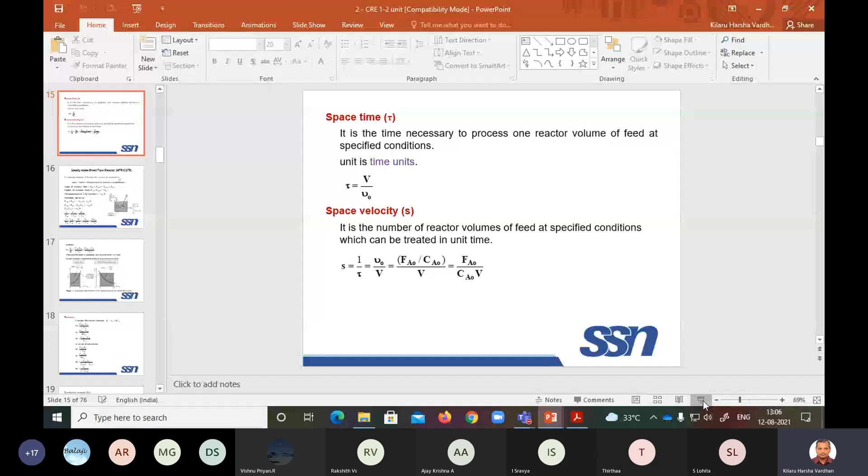Yeah. So shall we start, ma? Think... so let us start from where we left.

What is the last period for you today? Yamini? Professional electives, sir. Professional elective. It is going to happen. Class is there, professional elective. Okay, what I thought of taking 2 hours so that I can have... yesterday I lost one period, I can get back, I thought. Okay, so you don't want to give extra period to me. Okay, okay, we'll try to complete as soon as possible.

So in the first unit, we are discussing about the batch reactor, and the second unit is the continuous reactors. Some of you can mute, I'm getting some disturbance. Yeah, okay, thank you.

So in continuous reactor, there are two ideal reactors. Ideal in the sense it is ideal, right? So whatever reactors you are seeing in companies, all that, it's not ideal. There will be some non-idealities. You are expecting a conversion of around 90% in some reactor, but you may not get that 90% because of the non-idealities. What are the non-idealities? All that we'll study in the fifth unit, not now, right?

Let us not waste the time on where there will be non-idealities, all that. But what we are studying now is the ideal reactor. That is, ideal reactor, where you are assuming something and telling that if you assume this, your reactor becomes an ideal one where whatever conversion you are expecting, you are going to get it. But in reality, it won't come.

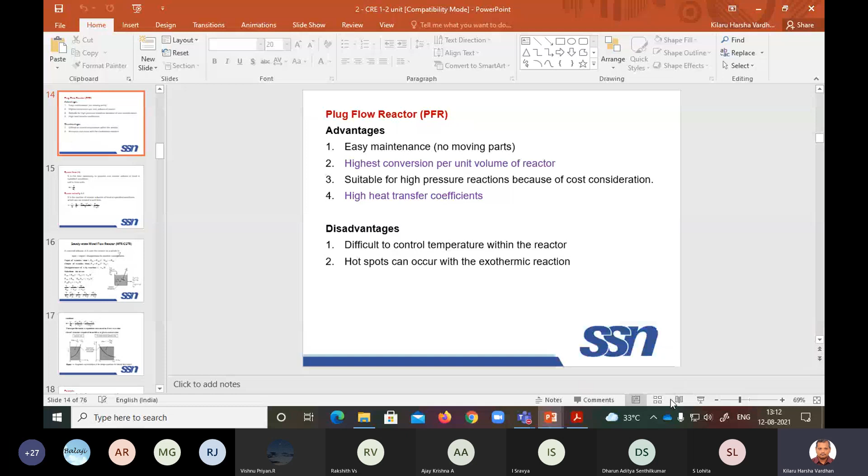So if you look at that particular thing like this, you write... so one second, let me write here so that... wait, what happened, no, the thing is... one second... hey, I'm unable to write.

What is happening? Ah.

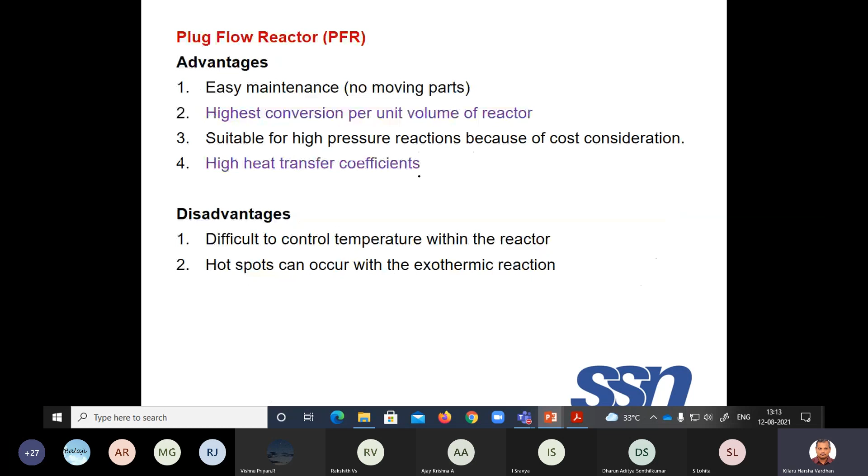Yeah, here I am writing. One is dt, let it be dCa by dt. That is nothing but the change of concentration with respect to the time, dt is the time. The other one is dou Ca by dou T.

And the other one, which we won't use here but in 7th semester you will be using in transport phenomena, is DCa divided by Dt. There is a difference between this d, capital D, and dou. So you should clearly understand the relationship between these three.

All three are derivatives. This is called ODE, ordinary differential equation. So your change is only in one direction. The only direction is the time, or x, whatever it is, right? That we call the ordinary differential equation.

You get partial derivative dou Ca by dou T. This is called PDE, partial differential equation, when the change of concentration is with respect to time and x. X is nothing but the length of the reactor, any particular length. So the concentration is changing not only with respect to the length, even with respect to the time. Then you get partial derivative.

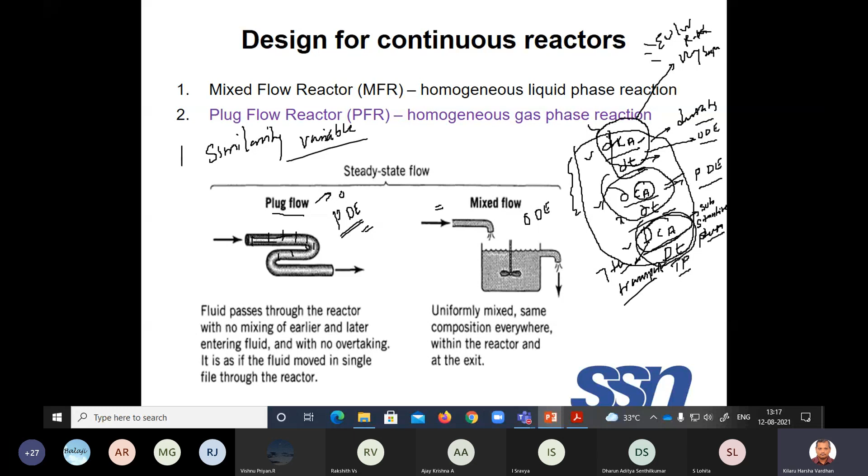Understand? So this you get ODE, but this we get PDE. The differential equation, if you solve the material balance, you get PDE here, you get ODE here, right? But in this, we'll make this PDE into ODE and then solve. We'll see how to do that, right?

Again, I'm telling you, a lot of mathematics will be coming here because chemical engineering, without mathematics, there is no chemical engineering. Too much emphasis on mathematics, especially differential equation solving. We get too many, that is why we have one separate subject called applied mathematics in chemical engineering. So you have to be a bit strong with the mathematics, whatever you studied earlier, especially second semester differential equation solving, right?

Yeah, we'll see now. We discussed in the earlier class what is space time and space velocity. These are two important 2 marks questions. The space time is the time required or the time necessary to process one reactor volume of the feed.

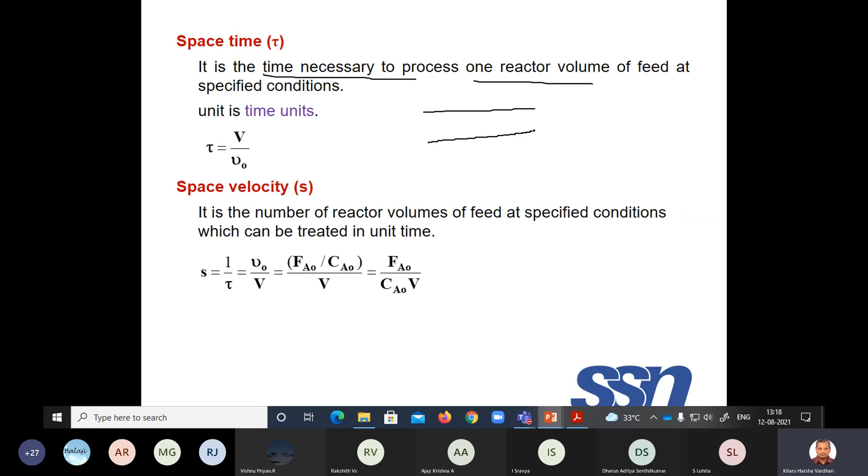Now, if this is a reactor inside, if this is a plug flow reactor, this is the inlet and this is the outlet. So let this volume of the reactor be V, divided by the flow rate V naught. That V naught is the volumetric flow rate through which the raw material is going. So the same volumetric flow rate, the volume of fluid will come out. Therefore, the entire volume divided by the volumetric flow rate will give you the space-time tau.

The volume has a unit of meter cube or liters, whatever you want to put, and volumetric flow rate will have a unit of meter cube per second. Therefore, this gets cancelled, and tau will have a unit of second, minute, or hours.

So very important, space-time is the time necessary to process one reactor volume of the fluid. This entire volume of the fluid, this particular molecule is coming here, this particular thing is going to be the last. So this entire stretch, this particular thing going out, how much time is it going to require? That is what we call the space-time.

The other one is space velocity. It is a number of reactor volumes of feed fed at specified conditions which can be treated in a unit time. So here you are calculating how much time is required, and here you see how many reactor volumes of feed - that is, per second how much reactor volume of feed is being processed. So it is nothing but 1 by inverse of this.

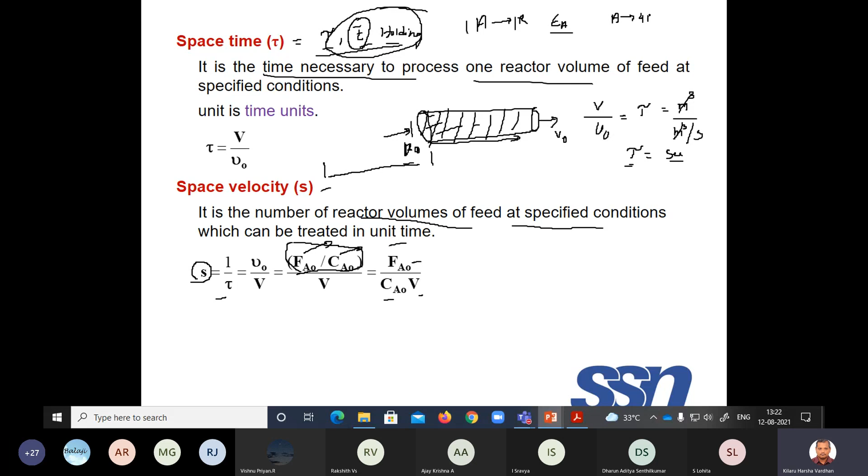If A is giving you R, and if the number of moles is the same at inlet and outlet, and there is no expansion factor, then all the times will be same. But if A is giving you 4R, like gas phase reactions, or 2A gives you some R, where there is an increase or decrease in the number of moles, especially for gas phase reactions, then these times will differ, because there is expansion.

Just like I told you, one example - popcorn. Initially it is a seed this much, but the moment it comes here, it gets popped, it occupies more volume. Therefore, the time of this molecule, if it is not popped up, it stays a bit more time, and since it is popped up, it moves for less time. So the expansion factor will make these times different. You have to be very clear about when these times will change.

So let us do the performance equation for this reactor, that is the mixed flow reactor. MFR is called as mixed flow reactor, or CSTR, continuous stirred tank reactor. This is called the performance equation. So we need to do a material balance.

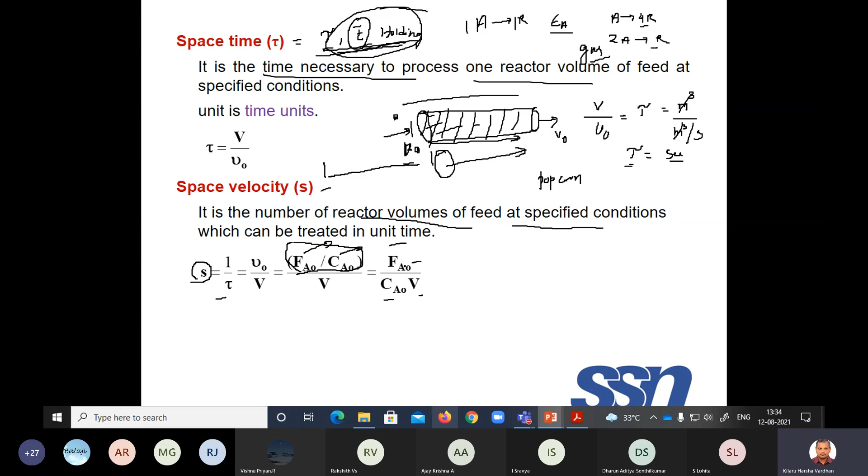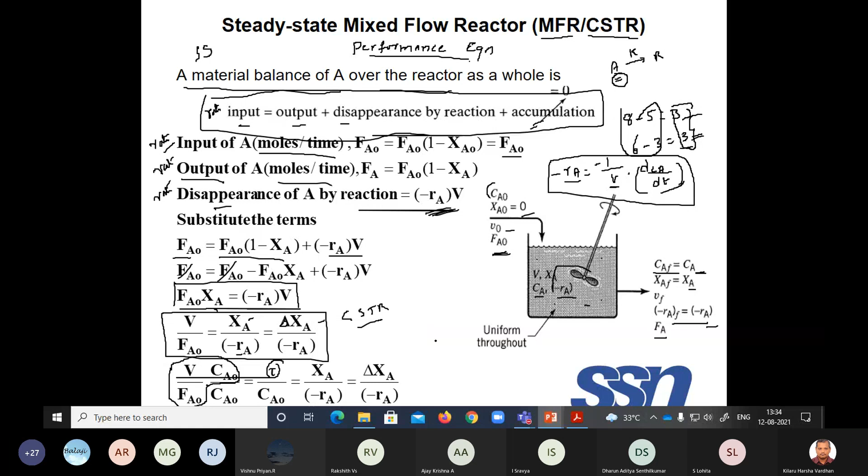So if you write this as tau, tau by CA0 is XA by minus RA is delta X by minus RA, right? So we can write the entire equation like this.

But we know that tau is V by V0. That is nothing but V by V0. V0 we know already how much it is. So we can rewrite as CA0 XA by minus RA, or CA0 minus CA by minus RA, because CA0 minus CA is nothing but CA0 into 1 minus XA. So if you substitute that, you get this particular thing.

So the final equation, if you write all three, is V by FA0 is equal to tau by CA0 is equal to XA by minus RA. This is the performance equation for MFR. Very important, let me write it again here. V by FA0 is tau by CA0 is XA by minus RA.

These three terms will come. So this is the performance equation. From this equation, we can determine what is the conversion for a reactor.

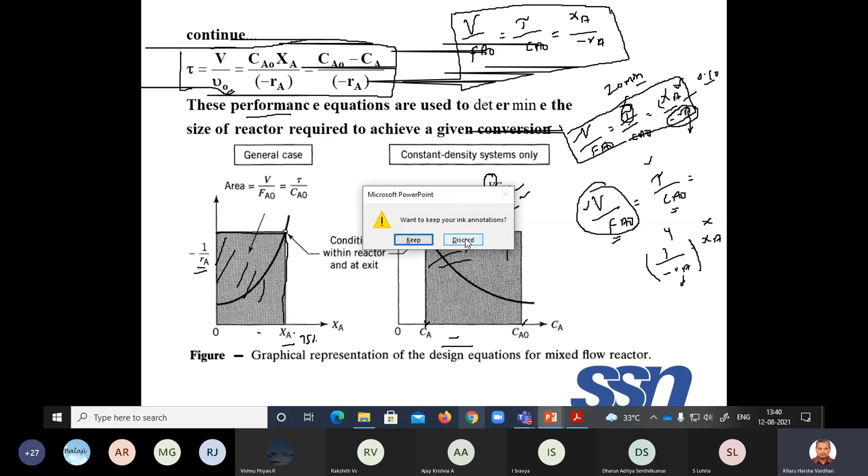Yeah, graphs, we play with graphs especially. Let me delete all this. Now again I will go. Yeah, any doubt here?

So the final equation is V by FA naught is tau by CA naught is XA by minus RA. This is the final equation for mixed reactor. If the reactor is mixed, we have to use this equation: V by FA naught is tau by CA naught is XA by minus RA. And I showed you how graphically we can calculate the volume or the tau, the time required for a particular conversion or a particular concentration.

Shall I go for the next? Now we'll see some examples, because this conversion, this rate is changing, right? What is rate? Rate is nothing but minus RA, rate RA or minus RA, whatever it is.

I have to again get the pointer options. Now here RA, minus RA, I don't know, it's K into CA power N. I need to find out what is the order and what is the rate.

So let us assume it is first order. Then see how this equation is going to change. Let us consider first order because this is an unknown quantity, that is why we are drawing a graph. It's not that easy to get because it changes with the order. So let us assume it is first order, minus RA equals K into CA.

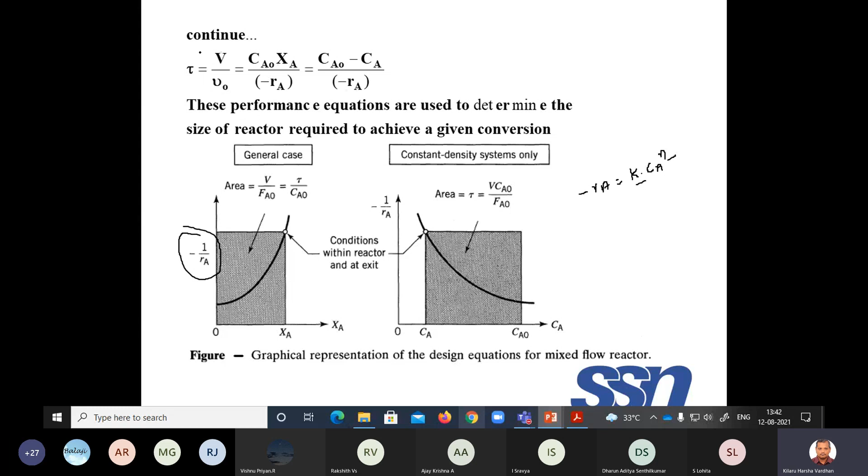We can write tau as CA naught minus CA by minus RA, because we already saw tau is CA naught minus CA by minus RA. Minus RA is nothing but K into CA. Now tau K is CA naught minus CA by CA. This is in terms of concentration. We can write in terms of conversion also, because tau is conversion CA naught XA by minus RA. So that is what we get: tau is CA naught XA by minus RA.

Yeah, how are you getting this? Can anyone tell how you are getting this equation? I don't know whether you are following it or not. I'm just doing V by FA naught is nothing but tau by CA naught, is nothing but what is happening, XA by minus RA.

So if I take these two, then what will happen? I can write tau as CA naught XA, CA naught divided by minus RA. That is what I wrote here. If I do these two, then what will happen? V by FA naught is nothing but XA by minus RA.

Then we can write V as XA FA naught by minus RA, or you can compare these two because these are all equal. V by FA naught is tau by CA naught, or if you want to write tau as V CA naught divided by FA naught, that is what I did in the previous one. Yeah, tau is nothing but CA naught V by FA naught. That is what you are getting here, from this only we get it.

This is the, what do you call, whatever equation you want to name, this is the big equation. From this only, whatever way you get, either you can compare 1 and 2, or 2 and 3, or 1 and 3, to get different expressions. So this you get from equating these two, and the earlier equation what we got here, this we get from equating 1 and 3.

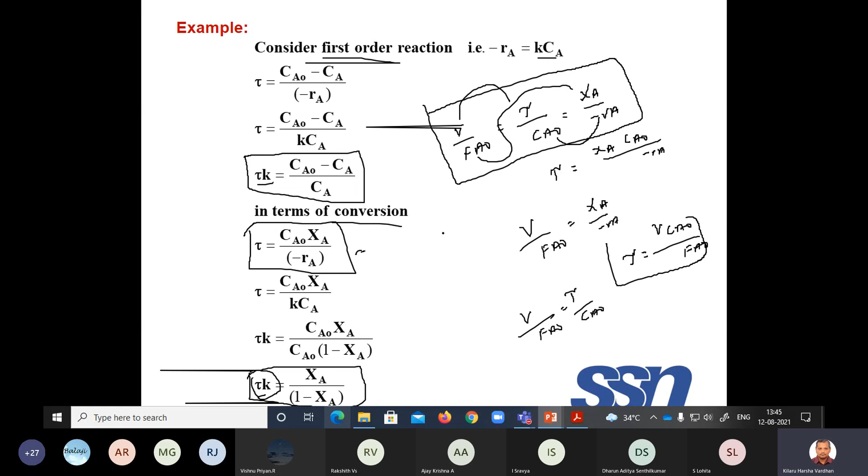So tau k for a first order process is XA by 1 minus XA. What will happen to the unit for this tau k? What is the unit for tau? Some people call it K tau. Tau is space time, it has a unit of second. K for the first order process has a unit of 1 by second. These seconds cancel out, so tau k is dimensionless.

Tau k is dimensionless for a first order process. But for a second order process, tau k is not dimensionless because k will have a unit of liters per mole per second. An extra term comes because a concentration term comes in. So k tau for a first order process is a dimensionless quantity.

This k tau is called, very important, the Damkohler number. It's a very important non-dimensional number, just like your Reynolds number, Schmidt number, Nusselt number, or Prandtl number, or whatever number you get in heat transfer, mass transfer, and fluid mechanics.

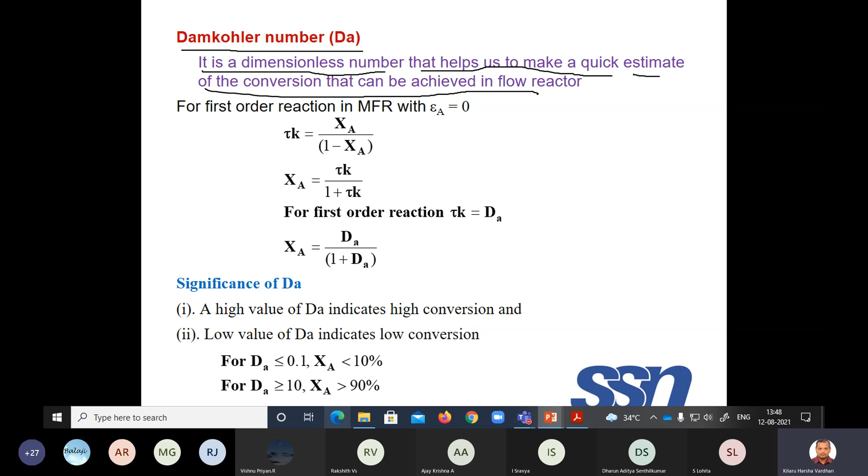Now we are taking a first order MFR with the expansion factor 0. When will the expansion factor be 0? When there are liquid phase reactions. For liquid phase reactions, your expansion factor will be 0, whereas for gas phase reactions, you cannot take this as 0.

So for an expansion factor of 0, tau k is XA by 1 minus XA. From this we can write XA as tau k by 1 plus tau k. For a first order reaction, tau k is called the Damkohler number. We can write XA as Damkohler number by 1 plus Damkohler number.

It's a very important 2 marks question. Or if you are going for GATE or an M.Tech exam, they'll give you some value of Damkohler number and ask you to calculate the conversion.

Very important, this equation is valid only for a first order process. It's not that you can take any order. Only for a first order process is your Damkohler number equal to tau k, because this is dimensionless. Other than the first order process, your Damkohler number will have some dimensions, or tau k will have some dimensions. Then you cannot call it a Damkohler number, because the Damkohler number is dimensionless. Only for a first order process will you get XA as Damkohler number by 1 plus Damkohler number.

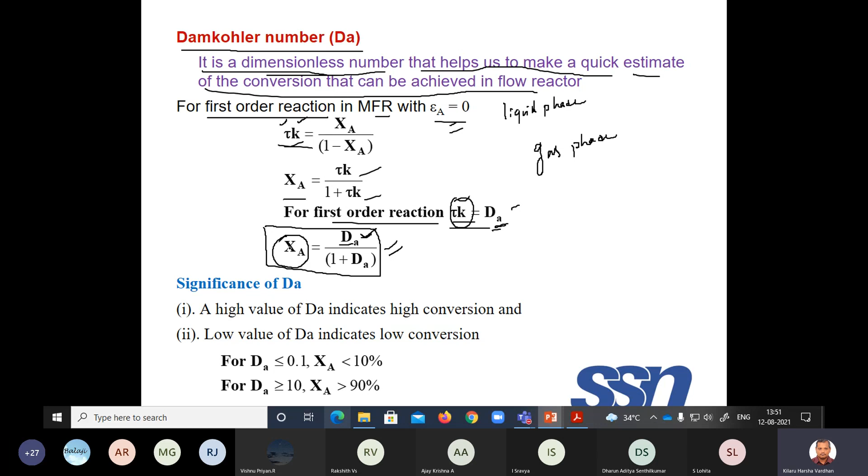That is what a very high value of Damkohler number indicates - a very high conversion. Why? Because Damkohler number is tau k or k tau. K is going to be constant because we are assuming it is first order and you are not changing the temperature. Therefore tau is going to change. So tau high means more residence time, more time the molecule is spending inside the reactor.

Therefore, high Damkohler number indicates high conversion, and low value indicates low conversion. If the Damkohler number is less than 0.1, your conversion will be less than 10%. And if the Damkohler number is greater than 10, you will get K tau or XA greater than 90, that is, conversion greater than 90%.

It's a very important 2 marks question: what is Damkohler number, especially in here.

What will happen if this is not 0? If this is not 0, then especially for gas phase reactions, we have some extra work to do, which we'll see now.

Because when it is not going to be 0, again with the same first order kinetics, we know that V is V naught into 1 plus epsilon A XA. From that we can write CA as CA naught into 1 minus XA divided by this particular term. Tau CA naught, this you get from the MFR equation. Tau is CA naught XA by KCA, because minus RA is first order, K into CA. We are writing CA as this particular expression for a variable volume: CA is CA naught into 1 minus XA by 1 plus epsilon A XA.

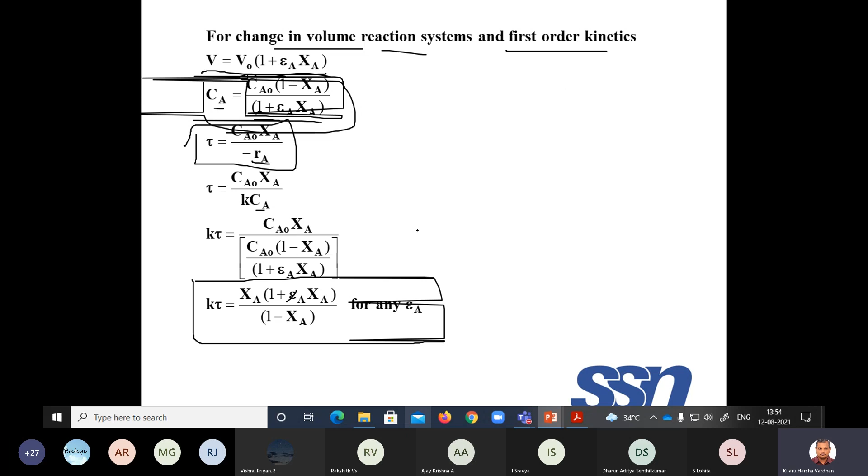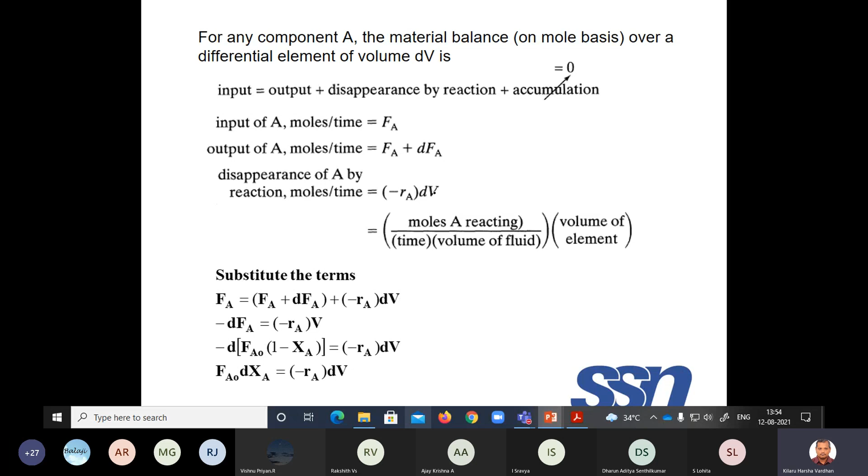Yeah, I think again plug flow reactor, I don't think I can complete this in 5 minutes. But if you give extra period, I can complete. I thought of completing this also, but I don't want to. Any doubt? Yeah, that's all for today. I think this new topic, I don't think I can complete because too much explanation is required here. It's not that easy to understand this fellow.

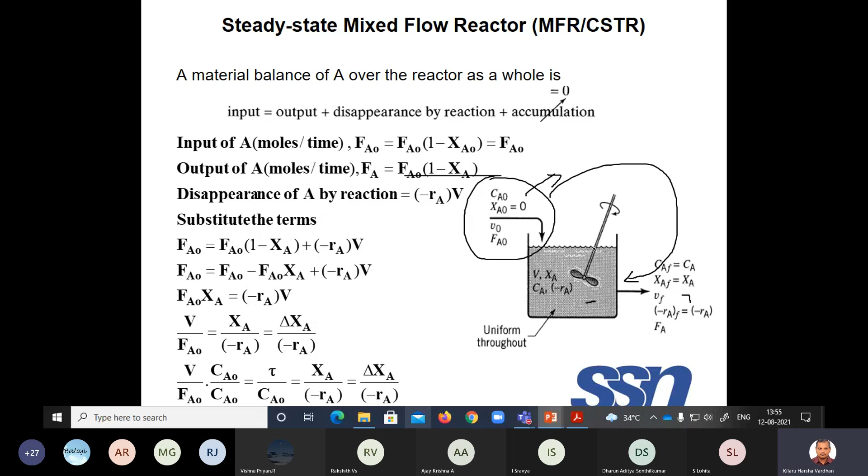This fellow is not an easy fellow to understand. Though this fellow is going in a tube, this fellow will make our life very difficult. It's not like this fellow where he is going out. This fellow is like a politician. Before coming to a party, he will have some ideologies. After coming to another party, his entire ideology will change according to the party he joined. That is why this famous example is the political fellow. Don't think I'm supporting someone, just to make my point clear I gave this example. So whatever the party policy, everyone will follow the same. But this fellow is not like that. This fellow is like a queue. One fellow goes in, that fellow should come out first. The second fellow goes in, he should come out second, not first.

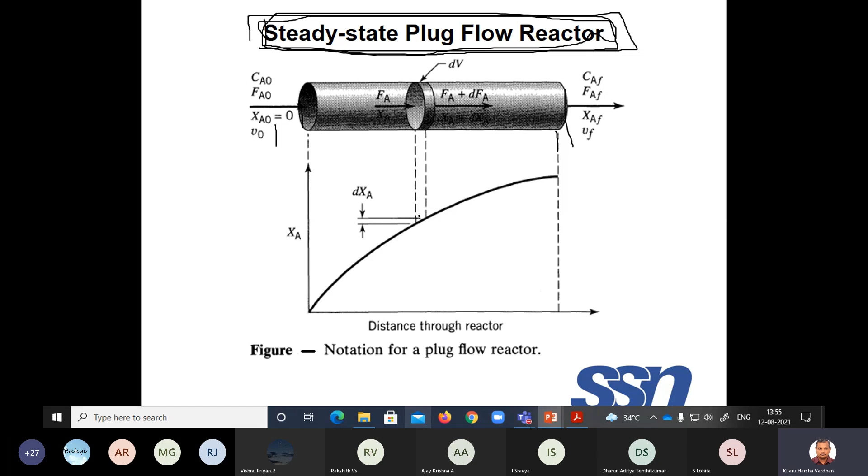So that condition we make, then life becomes much more complex, you get an extra term into the picture that we'll see in the next class. Yeah, today's class, any doubt? You can talk to me.

Today we discussed the most important performance equation for the CSTR, the performance equation for a CSTR or MFR or whatever back mix reactor. Different names are there, but everything is the same, either back mix reactor, continuous stirred tank reactor, or mixed flow reactor. It is V by Fa naught is tau by Ca naught is Xa by minus Ra. Somehow you remember this, this is our Bible, Bhagavad Gita, or Quran, whatever it is for CRE.

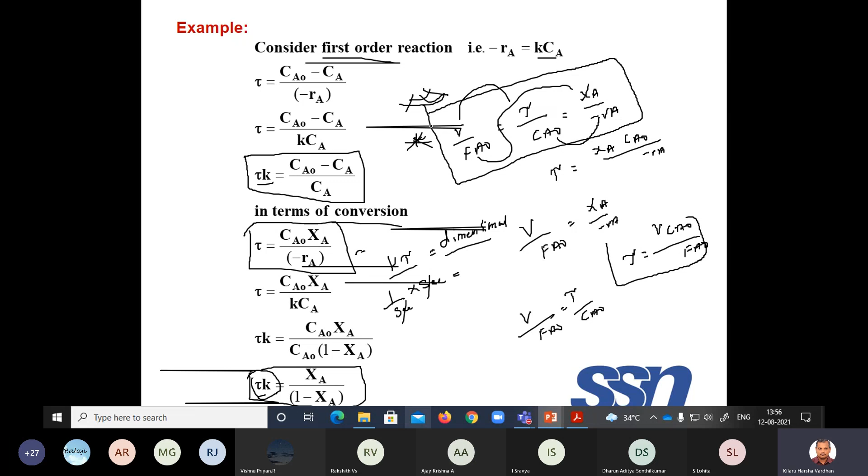This equation will come till CRE1 and CRE2. So this is the most famous, very important equation. Then we discussed the Damkohler number, which tells that as the Damkohler number increases, your conversion increases. Why? Because Damkohler number is tau k or k tau. K is a constant for a first order process, whereas tau is volume divided by volumetric flow rate, otherwise called the space time. The more the tau, definitely the conversion will be much more.